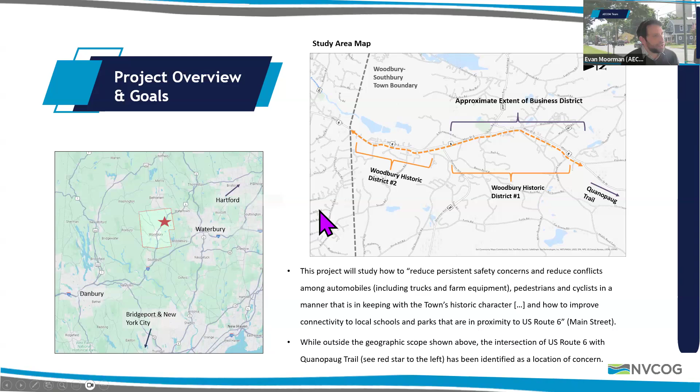Now, critically, we're also looking at the intersection of Quanopaug Trail and Route 6. As you can see here on the left map, that's shown by the red star - that's a location of concern. It's technically outside of the geographic scope of the main area, but we're working with NVCOG, who's already done a lot of work on this, to make sure that anything we propose will be consistent with what is installed there, and the steps being taken there for safety.

So just to give you a little area description, area background: as many of you likely know, the town of Woodbury is in the Naugatuck Valley in Litchfield County. It's founded in 1673, so a very old town for our country. It's about a little less than 10,000 people, and it's experienced pretty intense growth from about 1940 to 2010. Interestingly, the population actually fell a little bit between 2010 and 2020. That could be for many reasons, possibly related to COVID.

The main street is also a state route, Route 6. So there's this tension between it being a state route and a local, key access for the town residents.

There are two historic districts. Historic district number 1 is in the center of the town. It contains that town center, what you think of. It's mostly linear, extending outwards to a few intersecting streets, a few little corridors. It has a wide variety of homes from the colonial revival style, the town offices, City Hall, 5 churches, 3 greens, cemetery, etc.

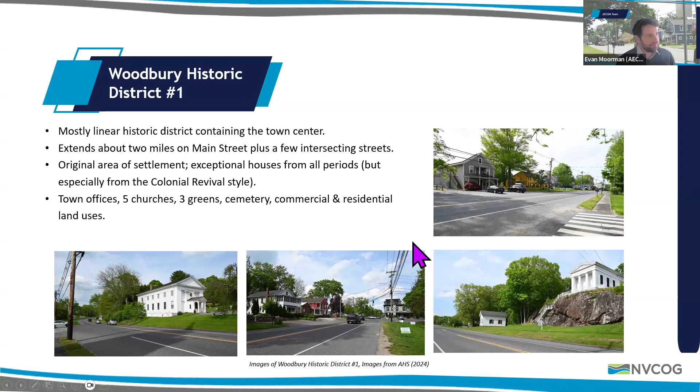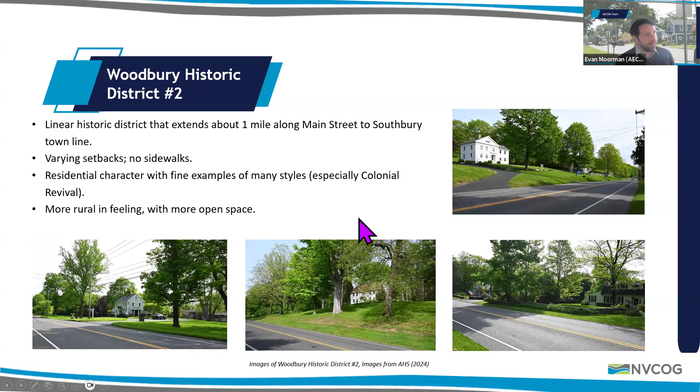Woodbury Historic District number 2 is also largely linear. It extends about 1 mile along Main Street to the Southbury town line. This is more rural, with fewer sidewalks, or no sidewalks rather, and it's more residential. But again it has that colonial revival feel, a lot of open space, so it's very beautiful. So there are these two historic districts that we want to ensure we take into account.

Now, where are people living? Here we have a population density map. I've noted the approximate extent of the main business district, and as you can see here, it's shaded by population density. So the population is along Route 6 in that sort of north-central area, north of Judson Avenue roughly, south of Middle Road Turnpike. But there are these other areas, key areas of density. You can see the one to the left on Sherman Hill Road, that's a condo. There's another area of high density sort of near Flanders Road. So we want to make sure that we're connecting where people live to the center of town and ultimately to each other.

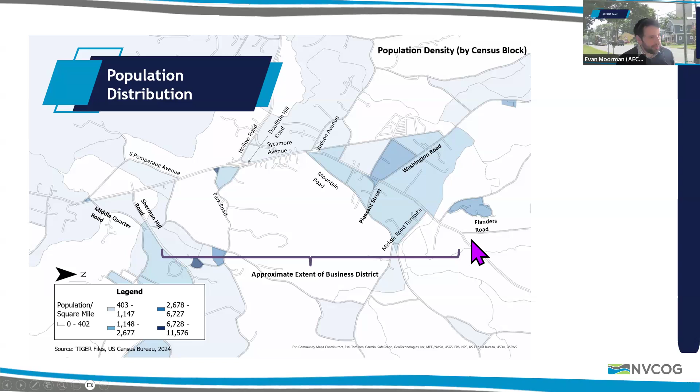The corridor description is what I'll talk about next. It's a 2-way urban minor arterial. Most intersections along the corridor are unsignalized, but there are a variety of signalized intersections - there are only 4. Speed limit is 30 miles per hour in the central section, rising north and south of that central downtown area. There are pedestrian facilities, sidewalks, but there are no bicycle accommodations as of now. Interestingly, sidewalks are mostly on one side of the road, and in varying conditions.

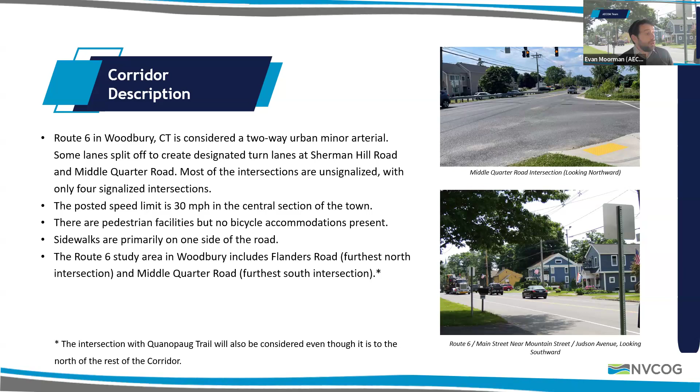So we want to make sure that people can access Route 6 on both sides. It includes Flanders Road, which is the furthest north intersection, and Middle Quarter Road, which is the furthest south intersection.

So we want to obviously tie into what has been done, all the good work that's been done in your town so far, which we'll talk about right now.

There are 4 previous planning efforts, previous studies that we looked at and wanted to make sure to incorporate to the best extent we could. Those are the Woodbury Plan of Conservation and Development, done only 4 or 5 years ago; a Creating a Sustainable Main Street report done by the Urban Land Institute in 2016, which looked at urban design features of your town; a state effort, CTDOT, US Route 6, 61, and Quassapaug Road intersection improvement; and the NVCOG Metropolitan Transportation Plan.

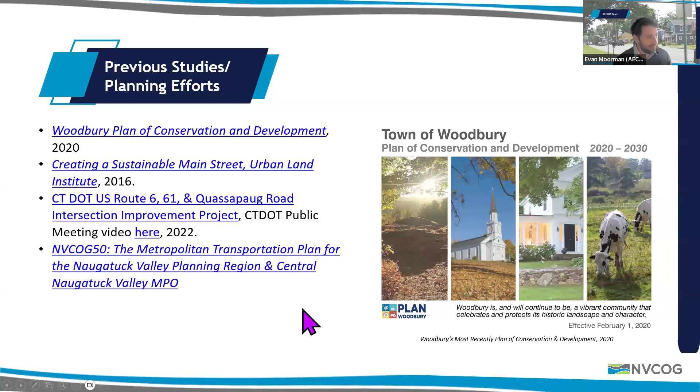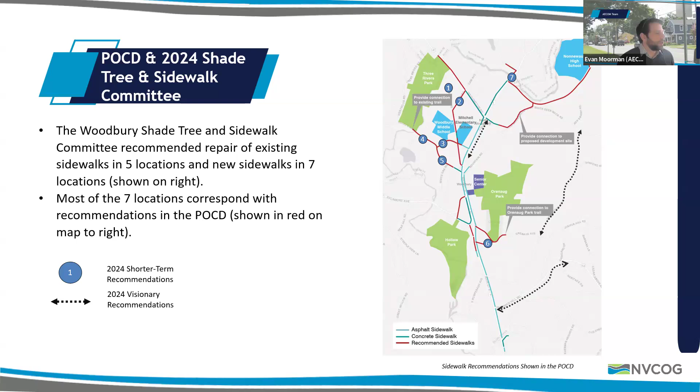So the first one, the POCD, Plan of Conservation and Development, came out in 2020 with a variety of sidewalk recommendations. This map here on the right shows at that time where there were sidewalks, and then also in 2024, the Shade Tree and Sidewalk Committee in the town took that and made other recommendations. As you can see here on the right, these numbers represent the locations that in 2024 were recommended - what they're calling shorter term recommendations, which are the numbers in the circle - and then they have these visionary recommendations, which are a little longer term but important. So we want to make sure that our plan corresponds with the recommendations here. At the time, the POCD identified safety issues.

Happily, the town's per capita crash rate is below the statewide average, which is good.

Interestingly, in 2018, the data showed that about a little less than half of crashes occurred on Route 6 in the town. So almost half of the crashes in the entire town are occurring there, which makes sense. Another quarter occurred on other state roads, so only about a quarter, the last quarter, are occurring on local roadways. So we're going to have to make sure that we make recommendations in line with state recommendations and state coordination.

In 2018, there was 1 pedestrian-involved crash, no bicyclist-involved crashes. However, it's important to look, when you're talking about bike and ped, at how many people are using the network right now, and then how many are being dissuaded from using it because of perceived or real safety issues. So you have to look deeper there.

The POCD identified key safety areas: Judson Avenue, the Route 61 area, Route 64, and Route 6 Pleasant Street, Washington Road. Those are areas that have had safety issues at the time and continue to be on our radar. The Urban Land Institute came in and conducted a report.

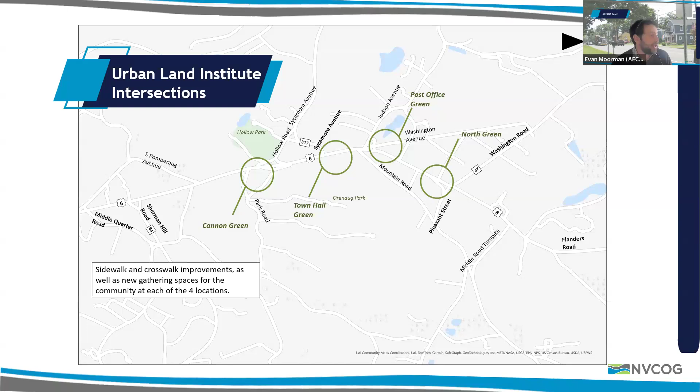Other recommendations were replacing the shoulder with parking where possible, except during snow, they were careful to note. Also replacing existing crosswalks with high visibility crosswalks and adding bulb outs, mid-block extensions of the curb, to shorten crossing distance and increase visibility of crossers, etc.

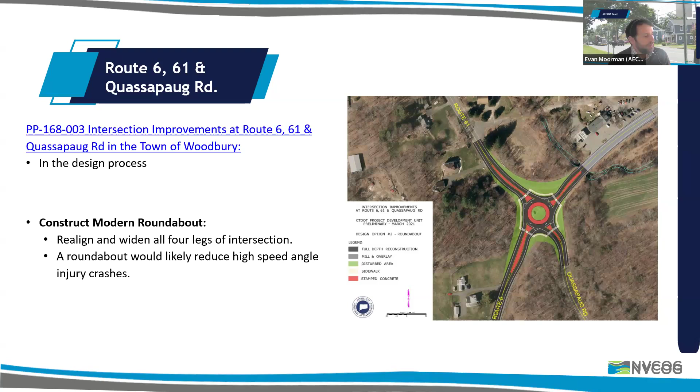I'm not going to spend much time on this, but this is the statewide effort improving the Route 6-61 Quassapaug Road area. The state CTDOT is proceeding with designing a modern roundabout. As you can see on the image, they're realigning and widening 4 legs of the intersection, and a roundabout is expected to, and has been shown to, decrease high-speed angle injury crashes, so decrease the most dangerous type of crashes.

Moving on to the general pedestrian network, which we assessed when we visited the town several times. As you can see on the map, the orange line shows where there are existing sidewalks, and the red circles show the curb ramps.

So as you can see here, this is showing the northern section of the town. There are, generally speaking, sidewalks on one side, in this case the west side. There have been improvements, especially around the schools, in terms of increasing sidewalk coverage and curb ramp coverage. But as you can see, there are still large sections of town that don't have it, and Route 6 only has it on one side here.

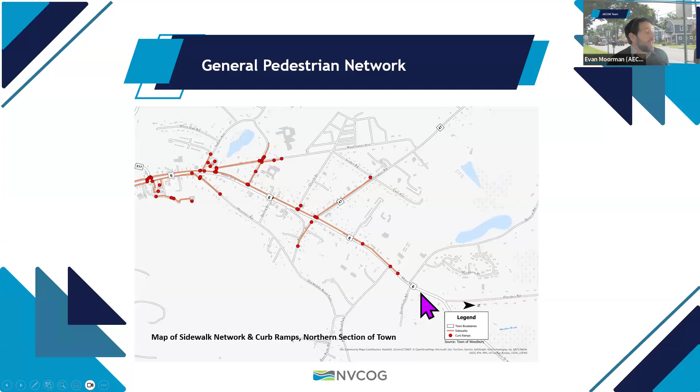And here's just a view of that same southern side. South of Hollow Road, you see there are no sidewalks on the west side, only on the east side, and other important streets. Sherman Hill Road, for example, Route 64, do not have sidewalks, nor does Park Road.

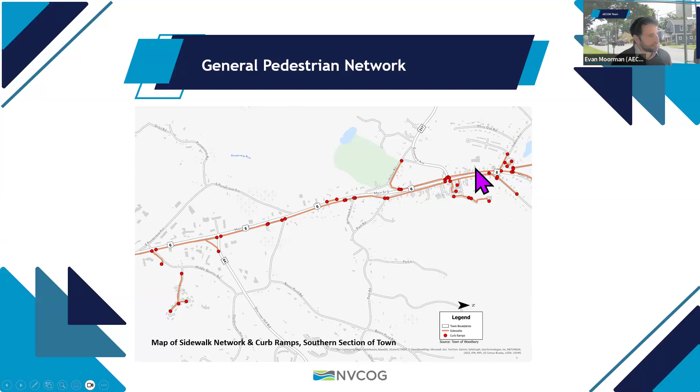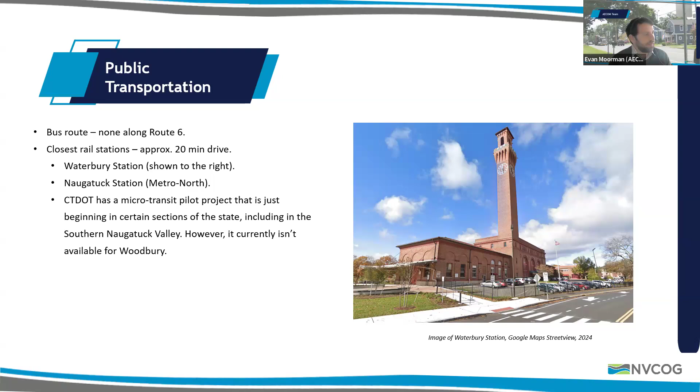In terms of public transportation, there is currently no public transportation along Route 6. There are some fairly close rail stations, approximately 20 minutes away. Waterbury Station is shown here in the image on the right. Also, there's Naugatuck Station for Metro North. Interestingly, CTDOT has a micro transit pilot project just beginning in certain sections of the state, including the southern Naugatuck Valley. It's currently not available for Woodbury, though.

Yeah, if I can just jump in real quick, Evan, because I know that is a recurring question. Thank you. A real sore point.

Within the Naugatuck Valley region, we are actually 7 bus operators across our 19 towns, as well as many towns that don't have service at all. One of those, and the only one we have any real direct control over, is the Valley Transit District. VTD operates in the 4 lower Naugatuck Valley towns: Ansonia, Derby, Seymour, and Shelton. They do demand response service, including ADA supplementary services and dial-a-ride services to supplement CT Transit's New Haven District and the Greater Bridgeport Transit District.

So they don't do any fixed route, just demand response. But as part of this pilot, CTDOT awarded, I want to say it was 7 programs, about 12 million total for a 2-year period, to allow these 7 transit districts to experiment with microtransit—an on-demand, app-driven service available to everybody.

So far, thankfully, the results have been fantastic, at least ours. I haven't seen some of the other transit districts, but I know it's working really well in Estuary, out by the Old Saybrook area, lower Connecticut River Valley. And it's been great for us. It's a really limited service in terms of the number of hours, and we're seeing tons of rides every month.

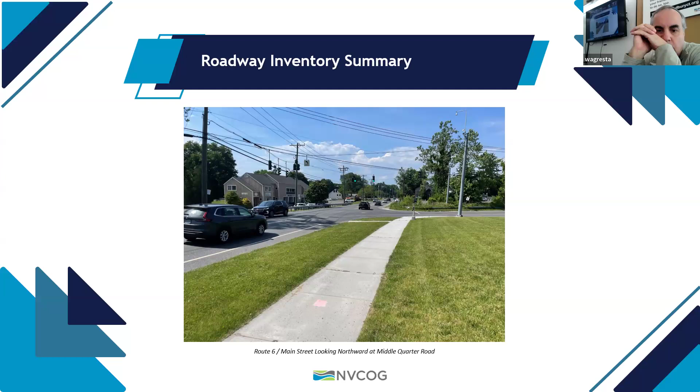I do want to point out one other thing: a bill was just raised in this legislative session. We have no idea how far it may go—there's not even language for it yet, it's still very preliminary—to establish a rural transportation fund or rural public transit fund. The bill number is 6829; I'll confirm that before I leave. Like I said, it's still very preliminary, but if it does have any legs and goes somewhere, it could be a promising start to bringing at least some regular transit here into town.

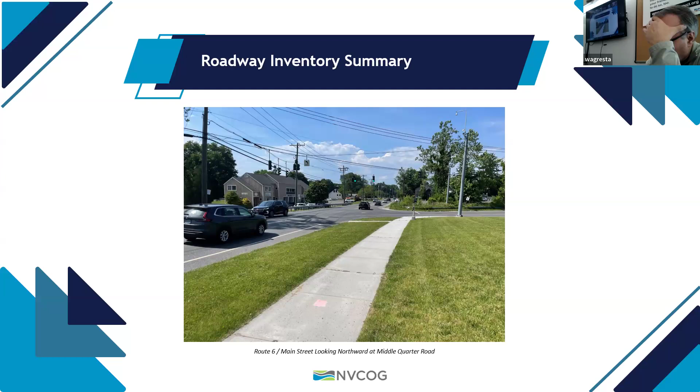Thank you. Thank you. Sorry, Evan. No, thank you, Rich.

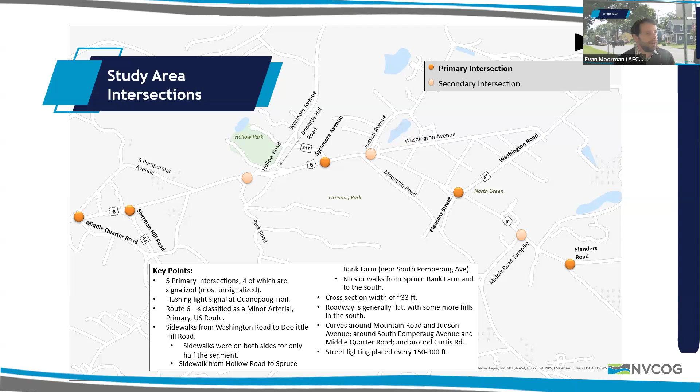So these are the study area intersections. Moving north, we're at Flanders Road, and then all the way south to Middle Quarter Road. There are 5 primary intersections, 4 of which are signalized. There's a flashing light signal at Quanopaug Trail, the one unsignalized intersection. There are sidewalks from Washington Road to Doolittle Hill Road, on both sides for only half the segment. The cross section of the road is about 33 feet, so not a huge cross section to work with for the roadway. It's generally flat with some hills in the south, fewer hills in the north, and there are some curves around Mountain Road, Judson Avenue, South Pomperaug Avenue, Middle Quarter Road, and Curtis Road, which may present possible visibility issues. There is street lighting placed about every 150 to 300 feet, which varies significantly.

Sorry, if I can interrupt one more time—I know that the slide deck he's presenting doesn't align exactly, it's not in the same order. We've cut some of it out, and if I can give a little extra background: I know a lot of this feels repetitive to work already done, a very in-depth analysis of what's already out there, which you all already know. But because this is a state road, and CTDOT gets to make the decisions about what happens here, we have to do this level of background detail. That makes sense. So there will be slides up here that don't exactly correlate to the pages in front of you. Yeah, thank you for that clarification.

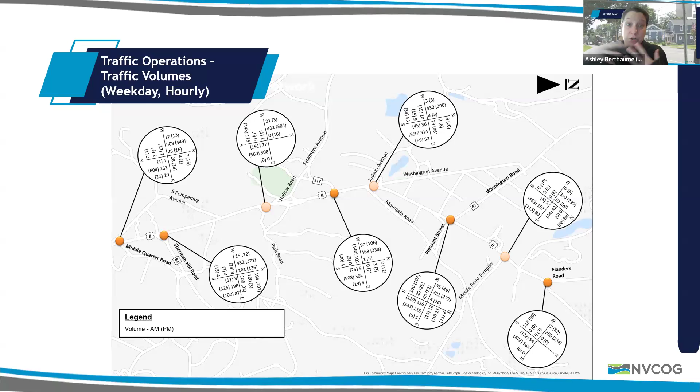So just looking at it from a volume standpoint, we are below capacity through this corridor. You can move. I'm picturing sometimes when it's not flowing, like, wow.

That would affect- and then overall, if you look at the intersections from an overall perspective, they all operate at or above an acceptable level of service, or LOS.

I drove the corridor several times during peak period in the evening, and I was doing the speed limit, about 30, 35, from one end to the other. I had to wait at some of the signals, but not multiple cycles. I waited for that cycle, the queue cleared, and I went. Even the actuations with pedestrians didn't make the queues super crazy.

So I think overall, looking at the volume and the overall operations, the corridor is operating fairly well. That's not to say there couldn't be some signal improvements, or that there shouldn't be a few more crossings with protective pedestrian phases, but it is operating fairly well.

There are a couple key movements that, if you pull apart the intersections, are operating below an acceptable level of service, one being the westbound movement at Judson Ave and Mountain Road. But that could just be a matter of there being a little more volume there, and we'll need to adjust the cycle timing. That'll be talked about in the future conditions section, where we recommend improvements along the corridor.

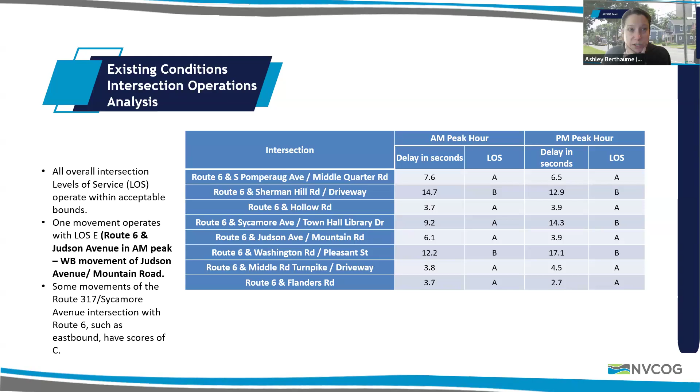I did pull that up - the AM peak hour is between 11 and 12, which is when the heaviest traffic in the morning is, and between 4 and 5 p.m. in the evenings. That's the midday peak, the 11 to 12. There's an AM peak we looked at that's different from the midday peak.

The morning peak of like 7 to 8 in the morning. Depending on the part of the corridor, we hung counters that use radar to count the number of vehicles as well as speed. The further south you go on the corridor, the earlier that AM peak moves. But this was just looking at the busiest hour before noon.

This one, located somewhere further south on the corridor, had a 7 a.m. peak hour. But as Ashley said, they studied a longer period than just a single hour.

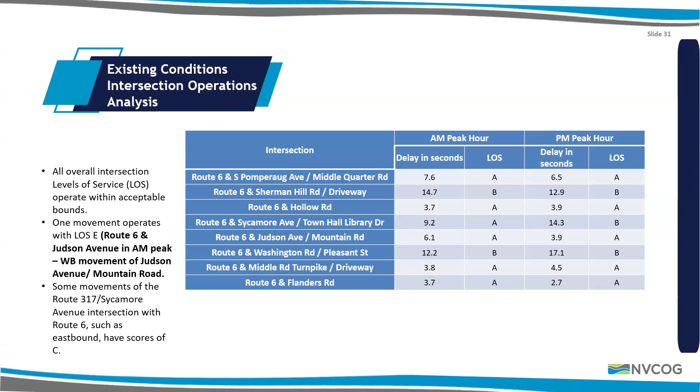Okay, does anybody have any questions? We can talk about it, or I can go into crashes.

We can keep going. So the other thing we looked at was not only the vehicle traffic and how that influences the roadway, but also the crashes that happen and the safety aspect, because that'll play a big role in pedestrians and where we want to put crossings, sight lines, and distances like that.

When you look at the crashes overall, across all the different types, there's predominantly a rear end crash problem, which tells me that either the yellow time and red time at a signal might not be long enough, or people are just following so close to each other that they're not leaving wiggle room. So it's something to maybe educate the public on, or we can talk about speed and how we reduce speed. That can be part of the recommendations.

Some of the other signals have a breadth of different types of crashes. You're not just looking at rear ends, you're looking at side swipes, which could be same direction side swipes, meaning they're trying to get around a left or right turn. There's a few different patterns, but overall the main type of crash is rear end, and after that it's a whole mix of crashes.

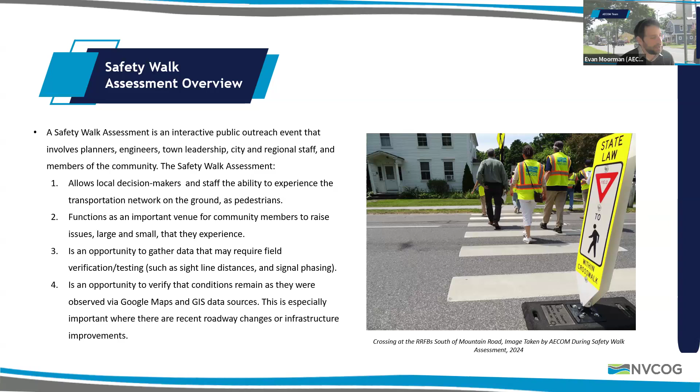This is important too when there's recent roadway changes or construction, because we can see how that construction is functioning and sort of the latest and greatest of the town. So we did that last summer, and we met at Town Hall.

We utilized the sidewalks along Route 6, starting going north. We crossed at Mountain Road from east to west, then turned south again to cross at Route 317, Sycamore Ave, because there was not a sidewalk on the west side, so we used the sidewalk on the east side to go south. Then we all went down to Hollow Road and returned to the Town Hall Library area, paying special attention to the crossing experiences.

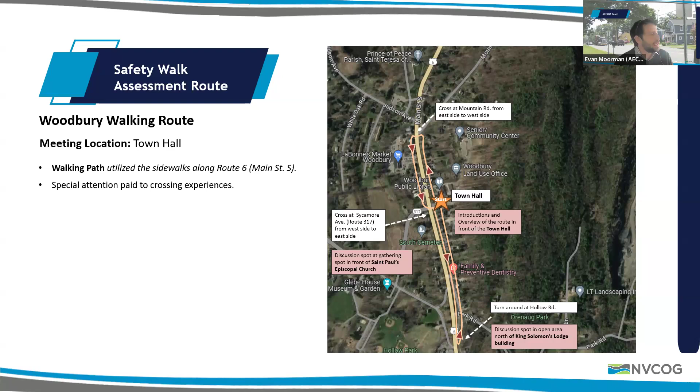We all crossed together. Of course, drivers can react differently to large crowds than they do to individuals, but it did allow us to experience what the pedestrians are experiencing.

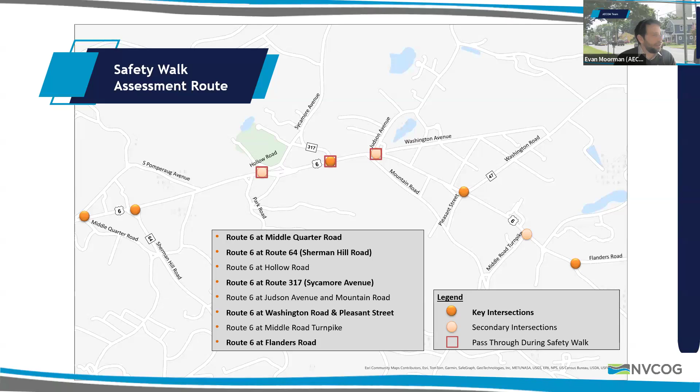Here's another map of the entire route, the entire study area, and the items in the red boxes are the intersections we saw on the safety walk assessment route. As you can see, we didn't go to all of them. We just went to that central section to keep it accessible and fairly short. But separately, Ashley, myself, and others went out and took data measurements on all the other intersections and the corridor in general.

So what are people telling us? What did people tell us? There's some speeding observed. Many people noted that those who are speeding are often truck drivers and others using this as a cut-through. They're not going to locations within the town, they're using it as a state highway.

That was a really common theme we heard. There's limited crossings along the corridor, especially in the southern section of that central portion. There are really limited opportunities to cross unless one jaywalks. And there's limited sidewalks east-west. So even in locations where we have that sidewalk along Route 6, many people emphasized to us, 'I have a hard time getting to and from Route 6, and so I don't walk,' or 'I don't feel safe having my kids walk.'

Another point we heard a lot, the final point I'll mention here today, is that the sidewalk should go north to Flanders Road, cross that river, and tie in more of that northern section of the town.

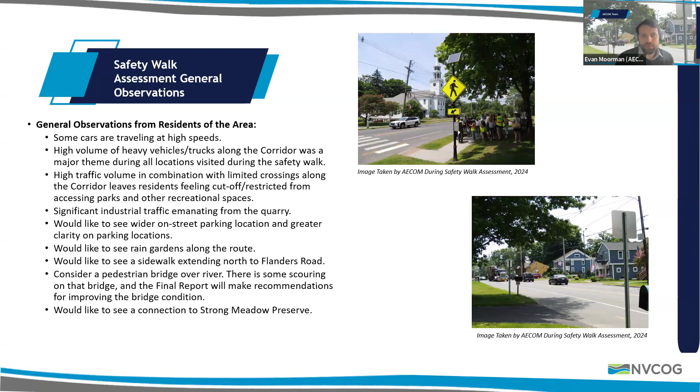So that was a really valuable arena to do our stakeholder outreach. That gave us probably the most background from town residents, staff, political leaders, and others. We did conduct other stakeholder outreach though. We really wanted to talk to the business community. As I mentioned, there are many churches, a large storied religious community in your town, so we really wanted to talk to them to the extent we could.

So I and others conducted 4 interviews with individuals. The first was a state trooper, now associated with St. Paul's Episcopal Church. I talked to staff from the Department of Senior Services, the Woodbury Senior Center. We talked to a VP of an insurance company - I won't share the name - associated with the Woodbury Chamber of Commerce. We used them to solicit views from the wider chamber.

And then we wanted to talk to the schools. There are a lot of schools in this area, a lot of students using Route 6. So we talked to a director of operations from Mitchell Elementary School.

Again, I just want to summarize the common themes we've heard. There's limited ped-bike infrastructure. There's a lot of general speeding concerns on Route 6 with many near misses. One thing I heard a lot about was that the crash data just isn't sufficient - we see a lot of near misses, near crashes. There's limited opportunities for pedestrians to cross Route 6, especially in the southern portion of that central section. A very common crash type, as Ashley mentioned, was many drivers whipping around left-turning cars.

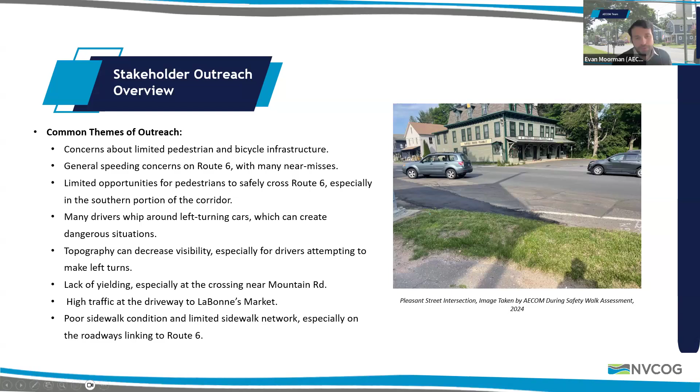And as I mentioned, we are considering Quanopaug Trail, which is outside of our central section, but that is another area we heard about so many times - at the safety walk assessment, in the interviews we did, and from this group - that this is a concern.

There's pretty high speed traffic on Route 6 going southbound, coming into town, and many people haven't slowed down sufficiently. There's a flashing light for drivers on Route 6 that alerts them to be on the lookout for drivers exiting Quanapog. There's also a grade change we took measurements on that may present visual difficulties for left-turning northbound drivers, plus a curve issue. Those curve issues and the grade change create sight line issues.

The town has already created a memo detailing concerns here and possible interventions, and we have been and will continue to work with the town on that final report, and with NVCOG as well. We want to assure everyone that we know this is an area of concern. It's not in our central section, but we really want to account for that moving forward.

So if I could conclude with next steps, I'll go through this quickly. There's speeding concerns. Many residents have expressed concerns about people not slowing down. You're coming from a rural roadway, they're going fast, using it as a cut through, and not slowing down in the center of town, which is a traditional New England town center. It's hard to cross east-west. That limits the town's potential for residents and for visitors who come to antique or do other activities. It's hard to get to key parks, Orenaug Park and others.